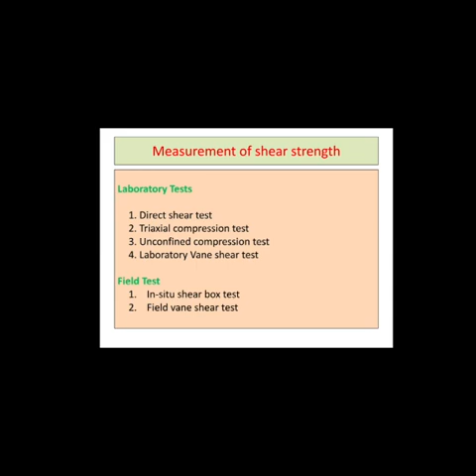Shear strength can be measured in the laboratory as well as in the field. The laboratory tests are performed on representative soil samples and must be done in such a way that represents the field conditions properly. The laboratory shear strength tests are direct shear test, triaxial compression test, unconfined compression test, and laboratory vane shear test. Some of the field tests are in situ shear box test and field vane shear tests.

Before proceeding with the different test procedures, let us understand the types of the shear strength tests based on the sample drainage conditions. There are three basic types of shear test procedures depending on the sample drainage conditions and can be adopted in case of shear box test and triaxial tests. These are commonly designated by a two-letter symbol. The first letter refers to what happens before shear and the second letter refers to the drainage conditions during shear.

These tests are unconsolidated undrained test or UU test, or undrained or quick test. Second one is the consolidated undrained test or CU test, also called consolidated quick test. The third one is consolidated drained test or CD test, also called drained test or slow test. In all these tests, there are two stages. One is consolidation stage, second one is shear stage.

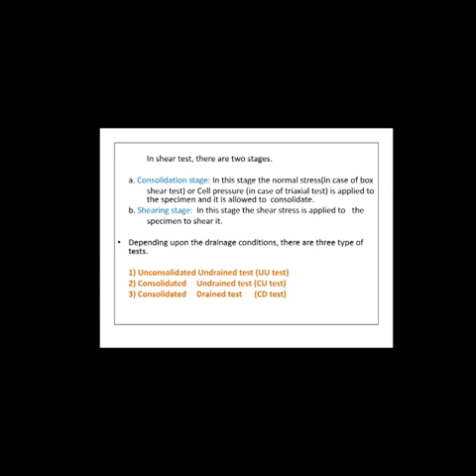In the consolidation stage, a normal stress or a cell pressure is applied to the specimen and it is allowed to consolidate. Normal stress is applied in case of box shear test or cell pressure is applied in case of triaxial test. Second one is the shearing stage. In this stage, the shear stress is applied to the specimen to shear it. Let us discuss these three tests in detail.

Number 1. Unconsolidated undrained test. The sample is subjected to a specified initial stress, that is normal stress in case of box shear test and all-round pressure or cell pressure in case of triaxial test. And without waiting for any consolidation, the shearing process is started without permitting any drainage of the water. Thus, no drainage or dissipation of pore pressure is permitted during either consolidation stage or shearing stage, that is, during the entire test.

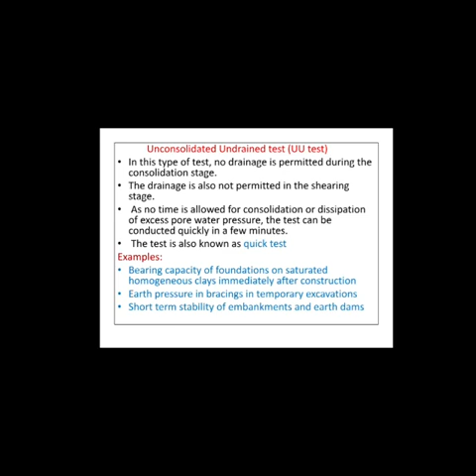The results of such a test can be used for field problems where critical stresses develop in a saturated soil mass too rapidly for any moisture content to change appreciably. Examples: the bearing capacity of foundations on saturated homogeneous clays. Second is the earth pressure in bracings in temporary excavations. Third is the short-term stability of embankments and earth dams.

The second test procedure is consolidated undrained test or CU test. In this type of test, the specimen is allowed to consolidate in the first stage. That is, the specimen is subjected to certain initial stress, that is normal stress or cell pressure, and thereby the pore pressures get developed, and there is sufficient time for these pore pressures to get dissipated, and thus the consolidation of the sample is complete. The drainage is permitted till the consolidation process is complete.

In the second stage, when the soil specimen is sheared, it is done so quickly that the pore pressures developed do not have a chance to dissipate, that is, no drainage is permitted during the shearing stage. The test is also called consolidated quick test, and the field examples are stability of consolidated earth dams under rapid drawdown condition.

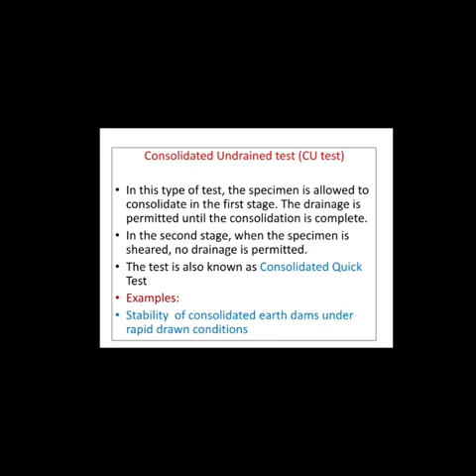The third test procedure is the consolidated drained test or CD test. In this type of test, the drainage is permitted in both consolidation and shearing stages. The sample is allowed to consolidate in the first stage. When the consolidation is complete, it is sheared at a very slow rate to ensure that fully drained conditions exist and the excess pore water pressure is zero. The test is also known as drained test or slow test. For example, final bearing capacity of soil where foundation is erected more slowly than the soil consolidates.

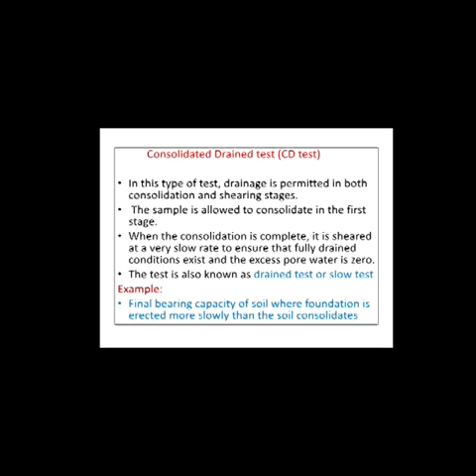Now let us discuss the box shear test or shear box test. It is the simplest, oldest and most straightforward method for measuring immediate or short-term shear strength in terms of total stresses. In this test, a sample is placed in a metal box, square in cross section. The size of the box is 6 cm by 6 cm and 2 to 2.5 cm depth. The box has two halves, one upper and another lower, dividing the sample into two equal parts. The sample is prepared in a sampler and then transferred to the box.

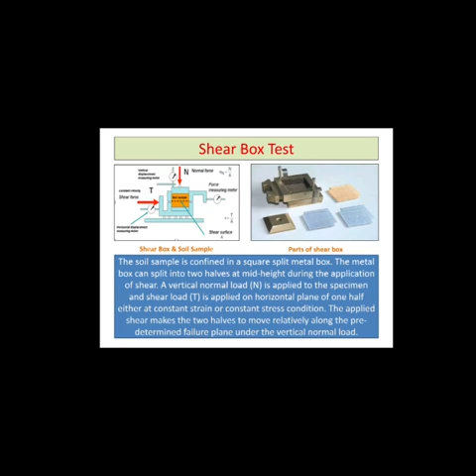The box has two grid plates, one each at top and bottom of the soil sample. These are kept such that the serrations are perpendicular to the direction of the applied load. Filter papers are also used between these grid plates and the soil samples in case of drained tests, along with the porous plates. A pressure pad is used to receive the normal load through the hanger. A U-arm is attached to the upper half of the box to transfer the load and is connected to a proving ring for shear load measurement.

The assembly is mounted in a larger box with pedestal and resting on the rollers. The entire assembly is mounted on a loading frame. A dial gauge is used to measure the deformations.

A normal stress, say 0.5 kg per centimeter square, is applied on the sample through the hanger. In some cases, the vertical movement of the sample is also measured, which indicates the changes in the volume. It helps in evaluating change in the density and void ratio during shearing.

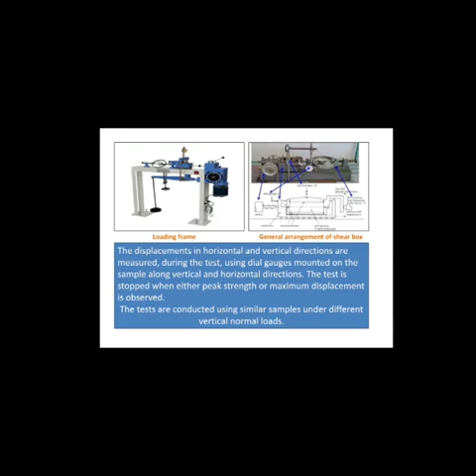The shear stress is applied gradually at a given rate, causing the two halves of the box to move relative to each other. The shear force is applied and corresponding displacements of the box are measured and the shear stress is calculated. The maximum shear stress is noted. The test is repeated on identical samples with different normal stresses, say 1 kg per centimeter square, 1.5 kg per centimeter square, etc., and respective maximum shear stresses are recorded.

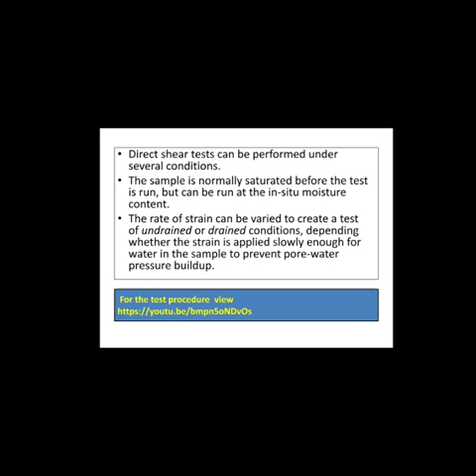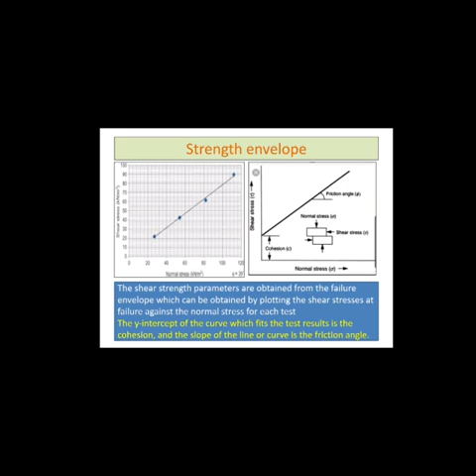For performing undrained test, that is UU test, grid plates without perforations are used, while for a drained test, perforated grid plates are adopted. The data is plotted on a graph to a natural scale and a straight line is fitted passing through maximum number of points. Extend the line up to y-axis and the y-intercept is measured, which gives the value of cohesion C. The angle of internal friction is the angle made by this line with the horizontal.

Now let us look into the advantages and limitations of direct shear test. There are many advantages. The test procedure is simple, relatively fast, especially for the granular materials. The test setup and the equipment is simple to test the soil under different saturation, drainage and consolidation conditions. The test principle is applicable to the material containing large particles. The recompacted samples are not difficult to prepare. The quick drainage of the pore water in the sample is usually easy to achieve because of the thin depth of the sample.

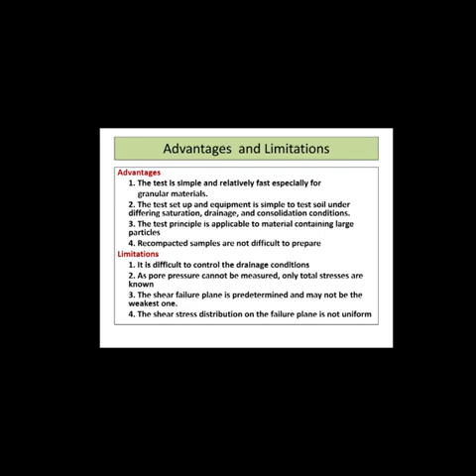And the limitations are: it is difficult to control the drainage conditions. As the pore water pressure cannot be measured, only the total stresses are known. The shear failure plane is predetermined and may not be the weakest one. The shear stress distribution on the failure plane is not uniform.

Now let us look into a problem. A direct shear test, when conducted on a remolded sample of sand, gave the following observations at the time of failure. Normal load is 288 newtons, shear load is 173 newtons, the cross-sectional area of the sample is 36 cm square. Determine the angle of internal friction, magnitude and direction of the principal stresses in the zone of the failure. This solution can be done both analytically and graphically. Analytical solution has been left as an exercise for the students. Now let us discuss the graphical solution.

Now, since the shear load is 173 on the area 36 centimeter square, shear stress is 173 by 36, that is 4.8 newton per centimeter square, that is 48 kilonewton per meter square. Similarly, normal stress is 80 kilonewton per meter square. We know one point on the Mohr envelope: point A with coordinates sigma as 80 and tau as 48 kilonewton per meter square. Since cohesion is equal to 0 for sand, the Mohr envelope passes through the origin and through this point A, which is having the coordinates 80 and 48.

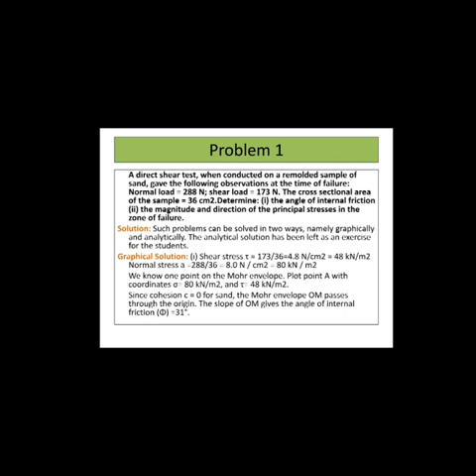The slope of the line OM gives the angle of internal friction, which is measured to be 31 degrees. Please note that the scale on both the axes, that is along sigma axis and tau axis, are the same, so that you can measure the angle with a protractor. In the figure, draw the line AC, which is normal to the envelope OM, which cuts the sigma axis at point C. With C as center and AC as radius, draw the Mohr circle C1, which cuts the sigma axis at points B and D.

Now, OB gives the major principal stress measuring 163.5 kilonewton per meter square, and OD gives the minor principal stress measuring 53.5 kilonewton per meter square. Now the angle ACB, which is designated as 2 alpha, is twice the angle between the failure plane and the major principal plane. Measurement gives 2 alpha equal to 121 degrees, or alpha is equal to 60.5 degrees.

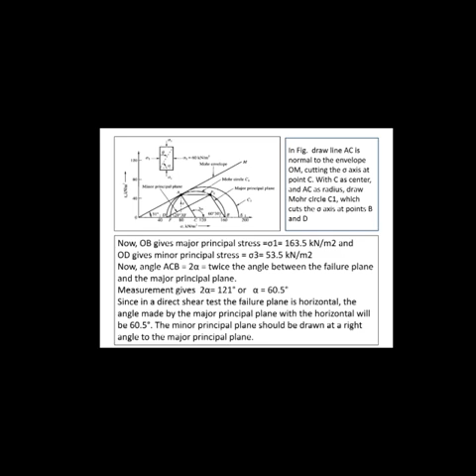Since in direct shear test the failure plane is horizontal, the angle made by the major principal plane with the horizontal will be 60.5 degrees. The minor principal plane should be drawn at right angles to the major principal plane. Now you can refer to the figure with the details, which you can understand in a better way.

Let's see another example. The following results are obtained from a series of drained shear tests on 36 cm square samples of silty clay. Plot the shear strength envelopes and find the shear strength parameters C dash and phi dash. Please note that here, since it is mentioned that it is a drained test, the shear strength parameters are mentioned as C dash and phi dash. The normal stress and shear stress values have been given as 20, 40, 60 and correspondingly 19.5, 28.6 and 38.

Now choose a graph sheet, normal scale, and adopt the same scale on both axes. Plot these 3 points and draw a straight line passing through these 3 points or the maximum of these 3 points. And you will get a straight line which represents the strength envelope. Extend it to the y-axis, and the y-intercept is the cohesion. That is, cohesion value is 10 kilopascals from the graph sheet. Measure the angle made by the strength envelope with respect to horizontal, and from the graph sheet it works out to be 25 degrees.

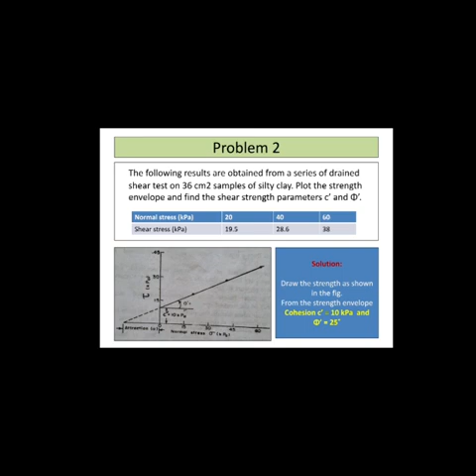Dear students, in this session I have discussed the necessary details of direct shear test and a few problems. You are advised to practice a few more problems for better acquaintance.